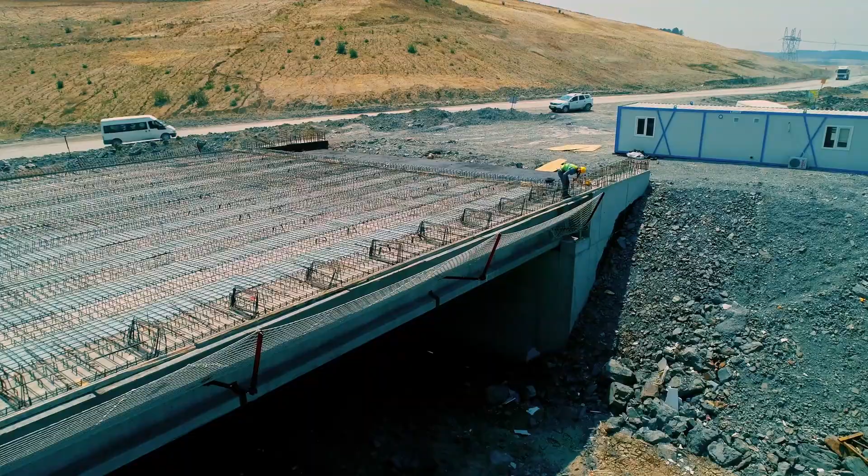Rather than attempt to repair the bridge, officials decided to hold a contest to design a new bridge. Unfortunately, the complexity of the bridge's design and the materials used in its construction led to a series of costly mistakes. The bridge took an estimated 11 years to build, and the total cost of the project is still unknown, with estimates ranging from $6.4 billion to $7.2 billion.

This is more than 7 times the original bid of $1 billion, making it one of the most expensive infrastructure projects in California. The most noticeable and costly mistake was the use of stability rods that often broke or corroded, requiring expensive repairs and replacements.

In addition, the quality of welding was poor, and misaligned parts of the deck created an increased risk of earthquake failure. Furthermore, the bridge was designed with guardrails rather than barriers, which corroded over time, further adding to the cost.

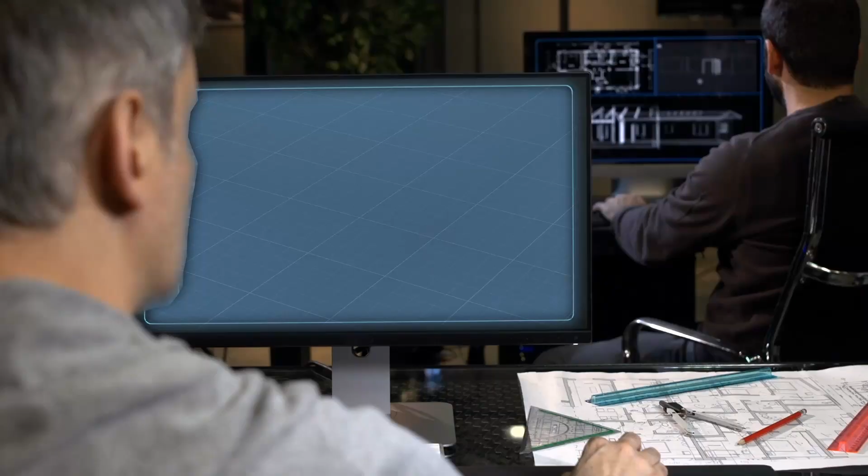The San Francisco-Oakland Bay Bridge is a prime example of how important it is to consider design, materials, and construction quality when creating large infrastructure projects. The cost and time involved in the bridge's construction have made it a cautionary tale for future projects and serve as a reminder of the importance of proper planning and execution.

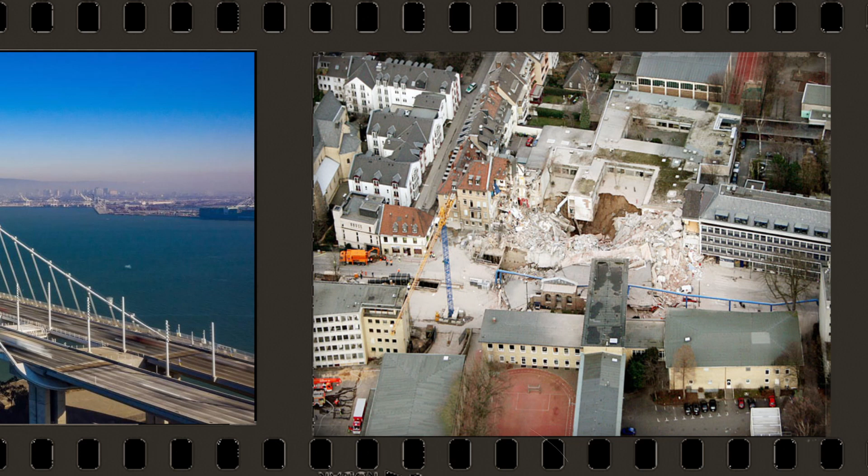The Cologne City Archive collapse. The collapse of the Cologne City Archive was one of the most expensive construction blunders in the world. Located in the heart of Germany's cultural capital, the archive held over 600,000 artifacts and documents that were vital to the city's history and identity.

The magnitude of the disaster was especially devastating because it was the result of a construction error. An investigation into the incident revealed that the building was not built to the standard required for a building of its size and scope, and the result was an immense amount of property damage and personal distress.

The archival collection held records of Cologne's past and had become a popular destination for historians, researchers, and visitors. Public interest in the archives had been steadily increasing, with individuals coming to search for information about their families and houses, and school classes visiting to learn more about the city.

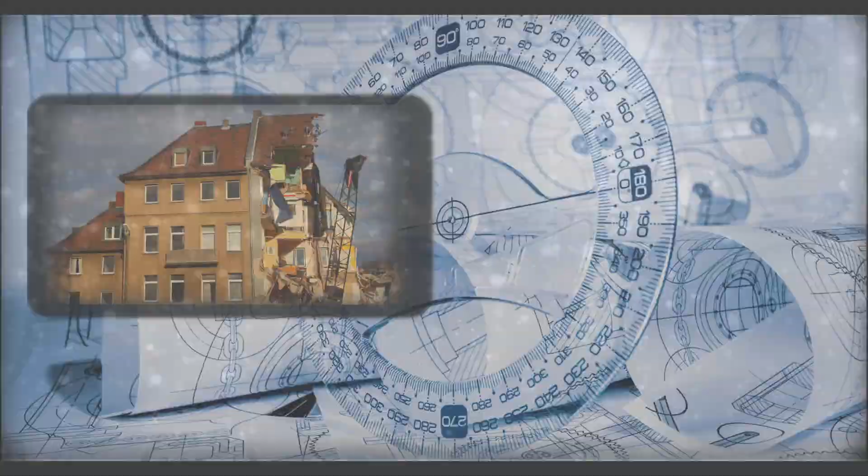Furthermore, the tragedy had a significant psychological impact on many of the people who had contributed to the archive and the visitors who had been coming to enjoy its contents.

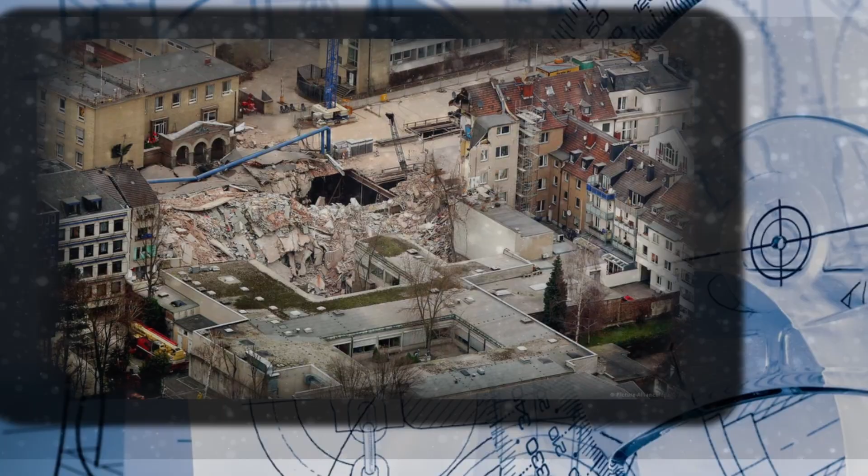The city of Cologne has since launched an investigation into the collapse and has pledged to rebuild the archive in its original form. The investigation is still ongoing, but the city has already taken steps to ensure that such a disaster never happens again. They have also announced a financial fund to reimburse the contributors of the archive for the loss of their possessions.

Though the collapse of the Cologne City Archive was a tragedy, it serves as a powerful reminder of the importance of proper construction protocols.

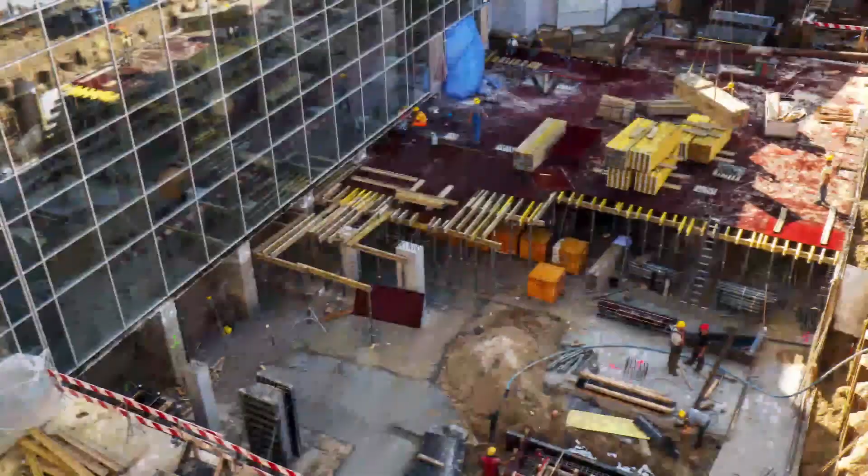This incident was a prime example of the costly consequences of disregarding the necessary safety requirements and the necessity of adhering to the highest standards when building large public structures. It was an expensive mistake, but one that has taught us a valuable lesson.

3 Mile Island, located near Middletown, Pennsylvania, is the site of one of the most infamous and expensive construction mistakes in the world. The 3 Mile Island Nuclear Generating Station, TMI, was built in 1974 and consisted of 2 nuclear reactors.

On March 28, 1979, TMI Unit 2 experienced a partial core meltdown, which resulted in the release of a small amount of radioactive material. The incident caused public panic and resulted in the permanent closure of the facility. It was caused by a combination of equipment faults, design-related difficulties, and worker errors.

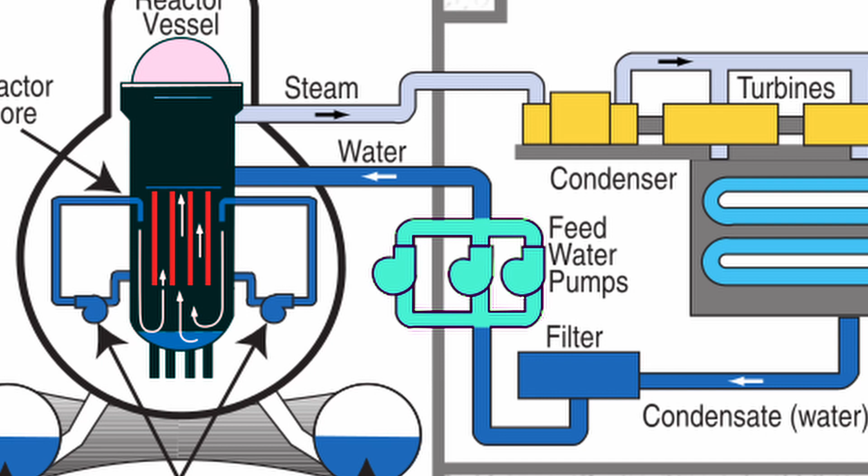It began when a malfunction in the plant's secondary, non-nuclear components caused one of the 2 reactors on the site to shut down. The primary feed water pump components could not send water to the steam generators, which remove heat from the reactor's core. As a result, the core overheated and the primary system was starved of emergency cooling water.

The consequences of the accident were severe. The facility was permanently closed and the cleanup efforts cost over $1 billion. In addition, the incident caused a public outcry and led to new regulations in the nuclear power industry.

The Nuclear Regulatory Commission, NRC, tightened and increased its regulatory control, and emergency response planning, human factors engineering, reactor-operator training, and radiation protection all saw significant revisions in order to improve reactor safety.

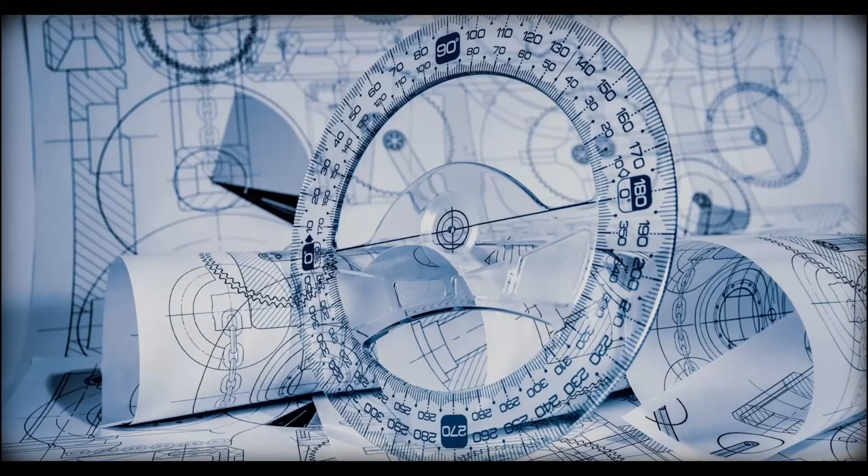The 3 Mile Island incident has been a sober reminder of the potential dangers of nuclear power. As a result, the public has grown increasingly wary of nuclear energy, and the industry has become highly regulated. Today, the 3 Mile Island Nuclear Generating Station stands as a reminder of one of the most expensive construction mistakes in the world.

The Noida building collapse is one of the most expensive construction mistakes in the world. The tragic incident occurred on Tuesday night in the Shahberi village of Greater Noida, India.

It involved 2 structures, an under-construction building and an adjacent building, which both collapsed due to too much moisture in the basement walls and inadequate building material used in the construction.

It is believed that 50 people, including 12 construction workers, were trapped in the rubble, with 3 people perishing in the tragedy. The incident has caused widespread shock and anger in the community and beyond, with many questioning the quality of materials used in the construction and the lack of oversight.

A magisterial investigation was launched into the incident, with a criminal complaint filed against 24 individuals, including the builder. Teams from the National Disaster Response Force, NDRF, were deployed to the scene to assist with rescue efforts, but progress was hindered due to low visibility at night.

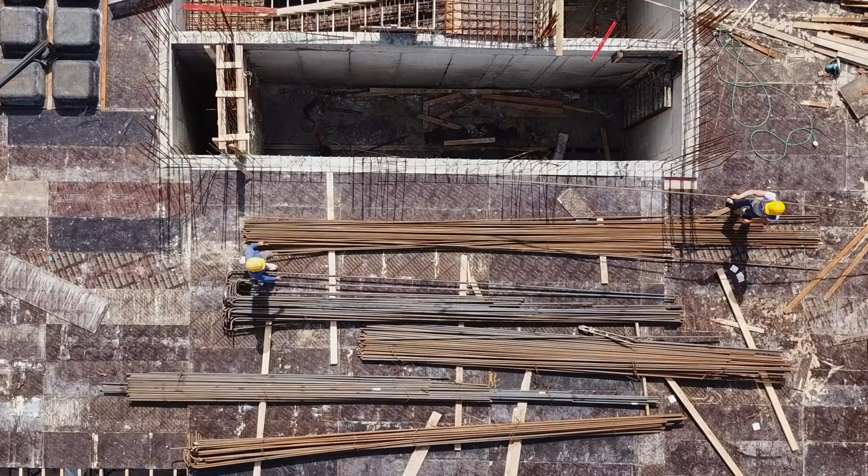This tragedy highlights the importance of proper construction oversight and safety regulations, as many unauthorized structures abound in the region. A number of safety issues, such as the use of low-quality materials, must be addressed in order to prevent similar disasters from occurring in the future.

Mahesh Sharma, a union minister and member of the Noida Lok Sabha, visited the crash site and expressed his condolences to the affected families. He also urged the government to take necessary steps to ensure such tragedies never take place again.

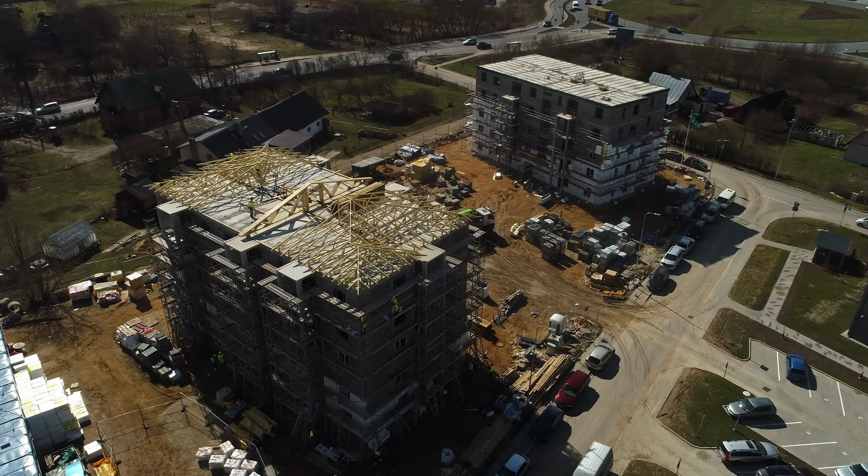The Noida building collapse is a stark reminder that there are still many issues regarding the safety of construction sites and the importance of proper oversight. It is essential that construction companies and workers adhere to safety regulations to prevent similar tragedies from occurring. The families affected by this tragedy deserve justice and compensation, and the government must take the necessary steps to ensure that this incident is not repeated.